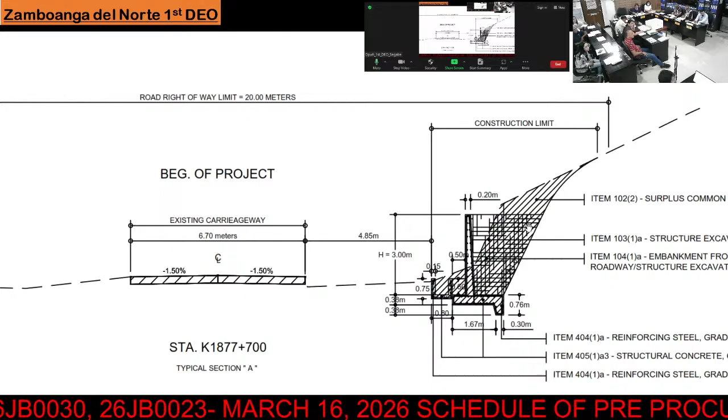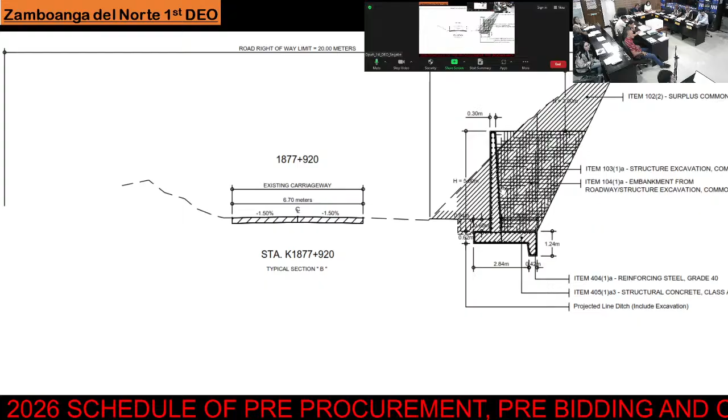So, for the 5-meter height retaining wall, this is our typical cross-section. Our reinforcing steel grade for the 3-meter and 5-meter retaining wall is grade 60.

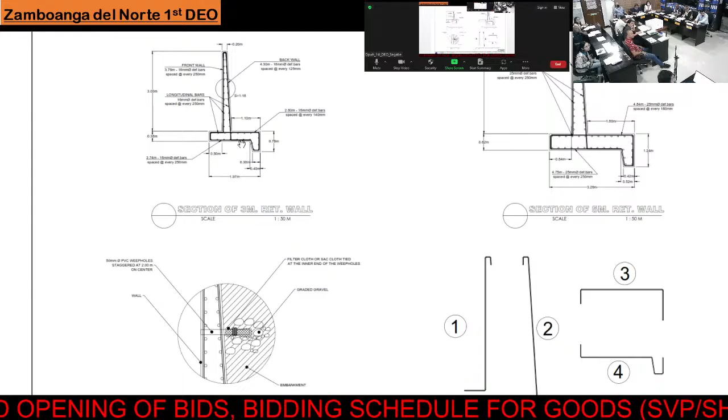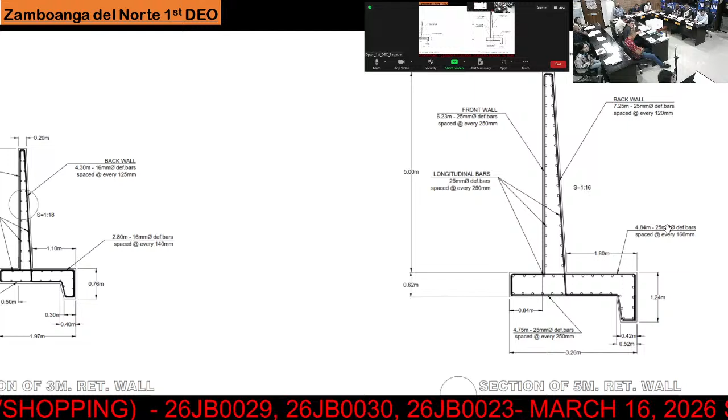Now for the details of our 3-meter retaining wall, the reinforcing steel used is 16mm, grade 60. Then for our 5-meter retaining wall, the reinforcing steel is 25mm in diameter.

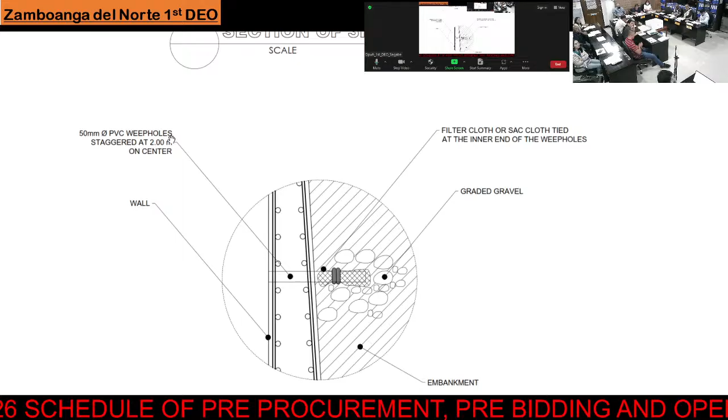For the retaining wall, we provided weep holes every 2 meters center, staggered, 50mm PVC weep holes. Then we have filter cloth and gravel behind it.

For the items of works, Part A, the provision of field office for the engineer on rental basis. The temporary field office, a 24 square meter van or equivalent, will be furnished and maintained for the engineer.

Operation and maintenance includes the electric and water bill. And provision of a 4x4 pickup service vehicle for the engineer on rental basis, including its operation and maintenance.

Then, provision of progress photographs. Every month, pictures must be provided, consisting of digital camera rental or printing of digital photographs and compiling them into a photo album.

Then in Part B, we have the project billboard signboard, as per the new DO on the revised guidelines for the installation of project billboards, series of 2025. This includes the Bagong Pilipinas logo and the billboard for COA.

Then, occupational safety and health program and traffic management, based on DO 13 series of 2018, revised guidelines in the preparation of process estimates for traffic management and safety health requirements.

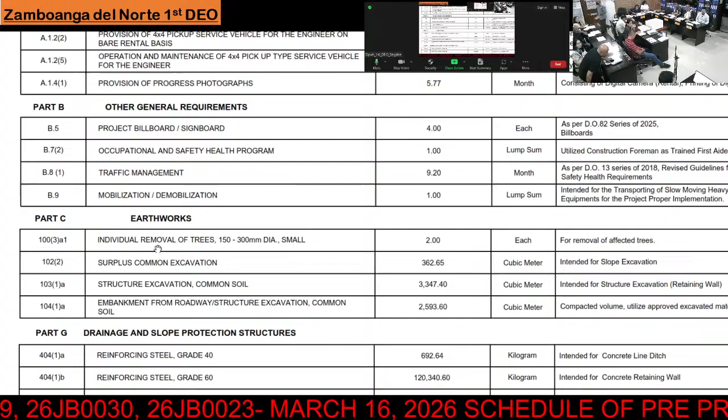Then mobilization and demobilization. In Part C, we have individual removal of trees - the trees here need to be removed.

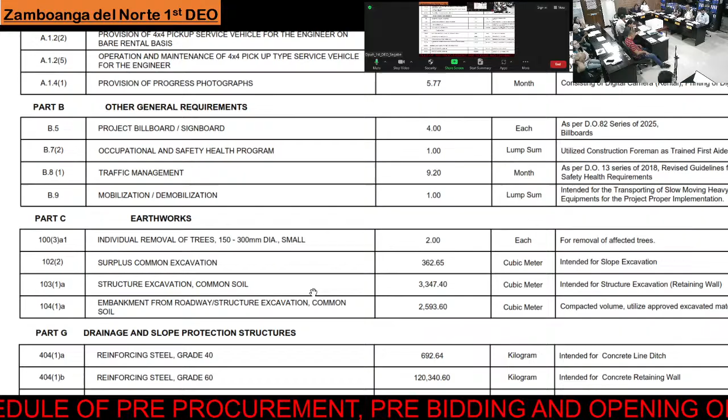Then surplus common excavation, intended for the cut slope in view of our retaining wall. Then structure excavation, common soil, for the retaining wall. Then embankment from roadway structure excavation also.

Then reinforcing steel grade 40 for our drainage protection structures, intended for the concrete lined ditch. Then reinforcing steel grade 60 for our retaining wall. Then structural concrete, 20.68 megapascal at 28 days, for the retaining wall.

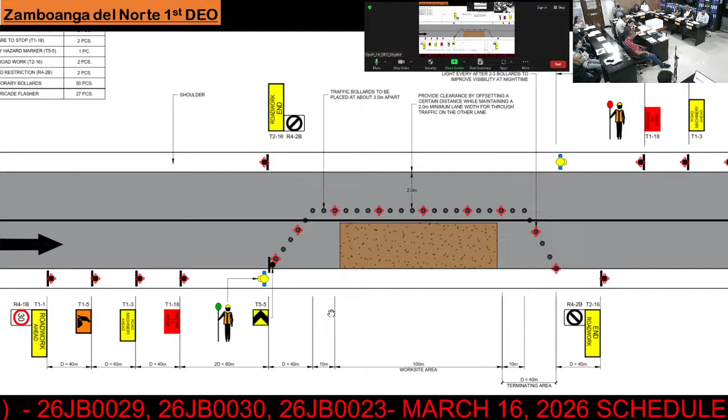For the minimum equipment requirement for our project: one low bed trailer, one backhoe, one bulldozer, one vibratory roller, one payloader, one motorized road grader, one dump truck 12 cubic yard, one water truck pump, one cargo truck 9 to 10 metric tons, one bar cutter single phase 25mm maximum rebar, one bar bender 3 phase 25mm maximum rebar, one bagger mixer, concrete vibrator, chainsaw, and barricade blinker lights.

For the minimum technical personnel required: one project engineer, one resident civil engineer, one materials engineer, one geodetic engineer, one construction foreman, a trained first aider, and one construction safety officer. So that's all for this project.

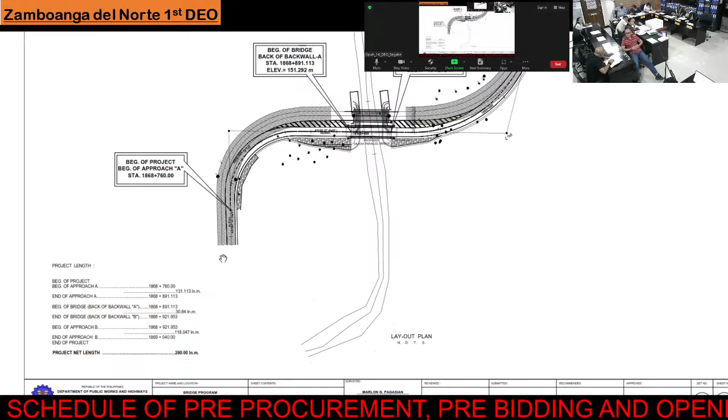So the bridge limit: beginning of project, beginning of approach A. So the approach is included in this project. 1868 plus 760, then end of approach A, 1868 plus 891.113, with a length of 131.113 linear meters. Then beginning of bridge, back wall A, 1868 plus 891.113, then end of bridge, back wall B, 1868 plus 921.953, with a length of 30.84 linear meters. Then followed by approach B, 1868 plus 921.953 up to the end of the project, 1869 plus 040, with a length of 118.047. The total project net length is 280 linear meters.

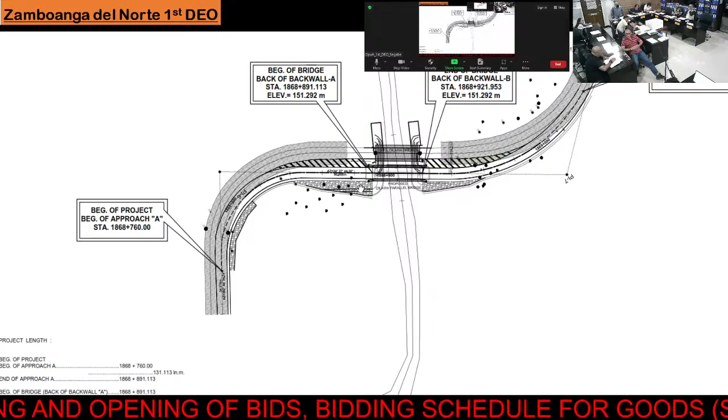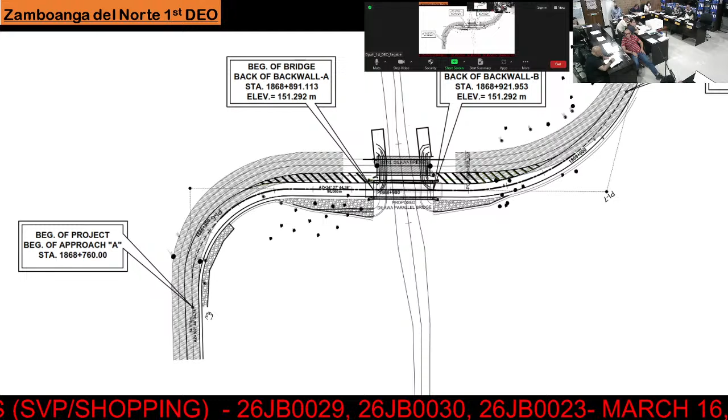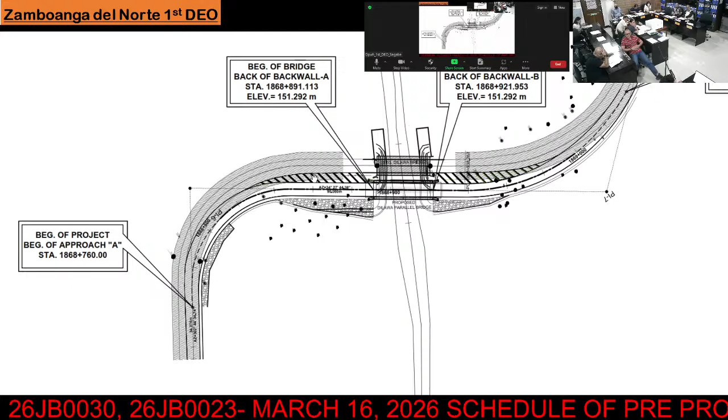Layout plan: this is the existing Dilawa bridge, the steel bridge. Our project is here at downstream. Then, the approaches, they follow the carriageway. From here, it also follows. Full width here is 6.7, including the hatched portion. Same for approach B. Then with slope protections.

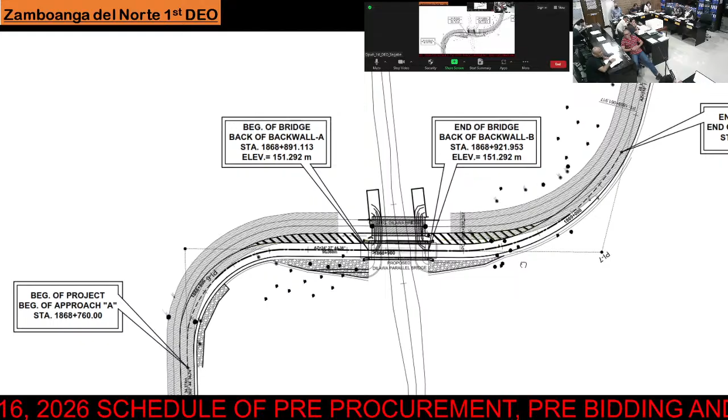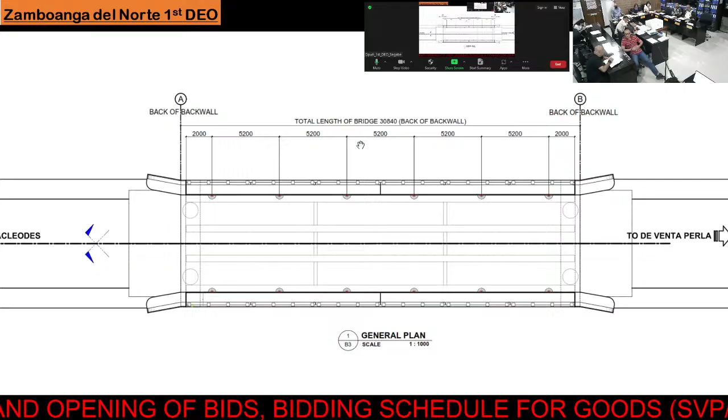So the showing here is the general plan sa bridge. The width is total width 9.54 and total length 30.84. Then the elevation, the elevation of the bridge is the same as the elevation of the existing Dilawa bridge.

We will proceed to summary of quantities. Part A, facilities for the engineers. First, provision of field office, operation and maintenance of the field office. Then, provision of pick-up service vehicle, operation and maintenance of pick-up service vehicle.

A.1.3, provision of survey instrument for the assistance to the engineer, RTK, survey instrument. Then, followed by provision of progress photographs. Then, provision of communication facility, equipment for the engineer, mobile phones.

Then part B, other general requirements, permit and clearances, cutting permit sa affected trees. Then, project billboard, signboard, safety and health program, traffic management, then mobilization and demobilization. Part C, earthwork.

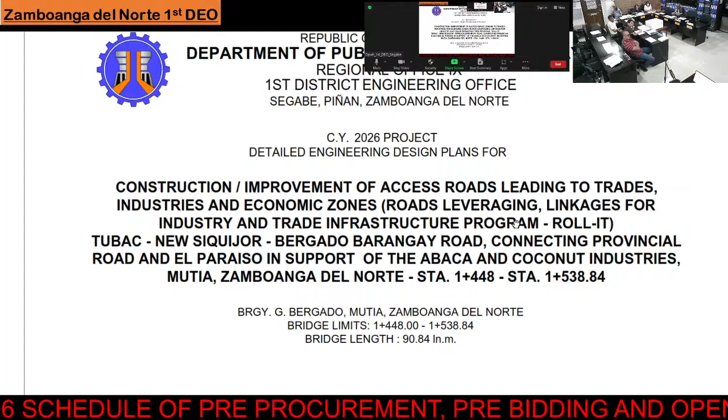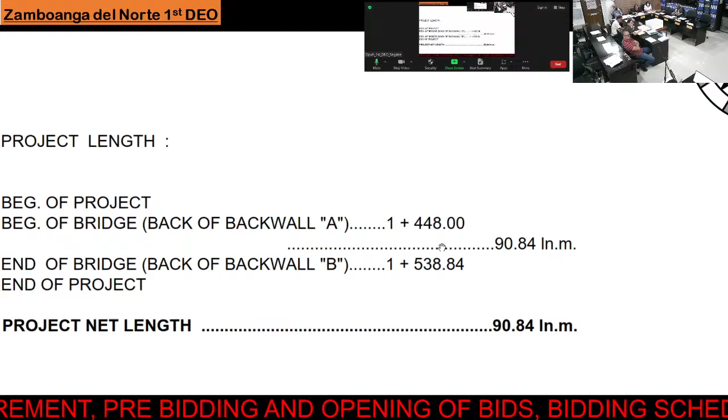Beginning of project, which is also the beginning of bridge, back of backwall, Station 1 plus 448, then Station 1 plus 538.84. So total length is 90.84 linear meters.

Bridge only is our scope of work. The bridge is 90.84 linear meters in length, with spread footing and using prestressed concrete I-girder.

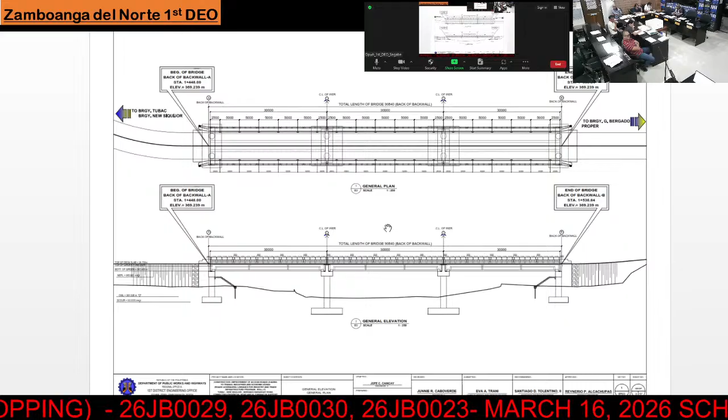I also prepared a summary. Let's proceed to the summary. The scope of work is bridge construction only.

For bridge construction, item 400 (6), structural steel sheet piles furnished. Foundation of abutment A and B is for protection and support of embankment only.

Item 400 (6), furnished. Item 404, reinforcing steel grade 40, for abutment A and abutment B, pier 1 and pier 2 only.

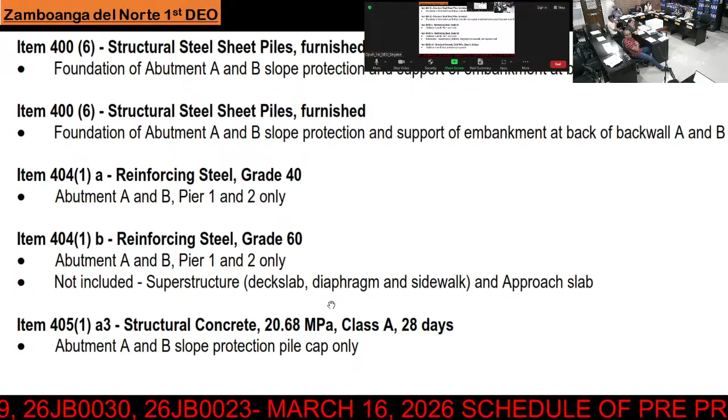Not included: superstructure, which is the deck slab, diaphragm, and sidewalk, and also the approach slab. So no superstructure, no deck slab.

Item 405 1A3, structural concrete 20.68 megapascal for abutment A and B, for protection pile cap only. Then item 405, structural concrete 27.58 megapascal, class A, for abutment A and B, pier 1 and pier 2 only. This covers abutment A and B including the footing up to capping.

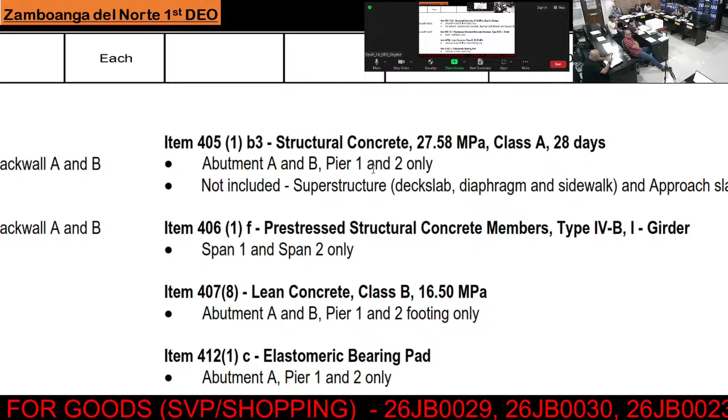Backwall, for the pier, up to capping only. Not included: superstructure, deck slab, diaphragm, and sidewalk.

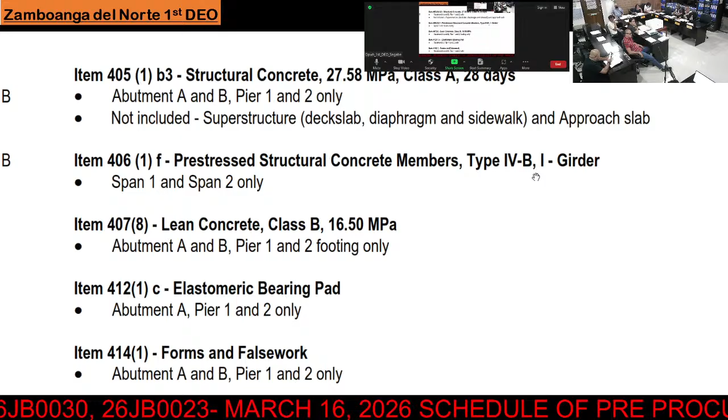Proceeding to item 406 1F, which is the prestressed structural concrete members, type IV-B girder, I-girder, for span 1 and span 2 only. So for span 3, there is no girder included.

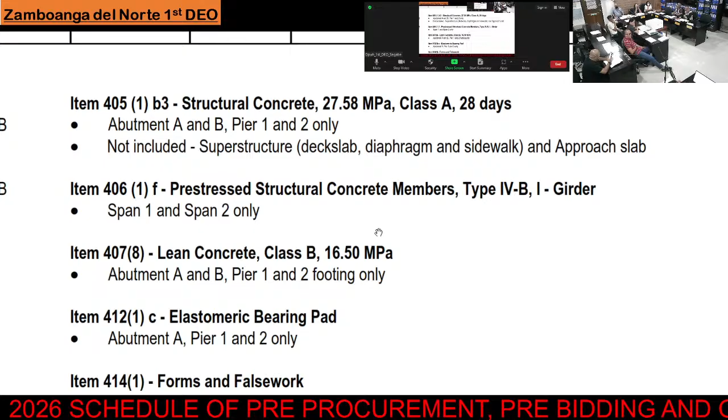That's correct for span 2. So that's 8 girders total, 4 plus 4, 8 only.

Then item 407, lean concrete for the abutment A and B, for pier 1 and 2 footing. Then the elastomeric bearing pad.

Then we included item 414 for forms and falsework, for abutment A and B, pier 1 and pier 2. That's all, okay, thank you.

So, partial construction, phase 1. Okay, let's bring the camera in.